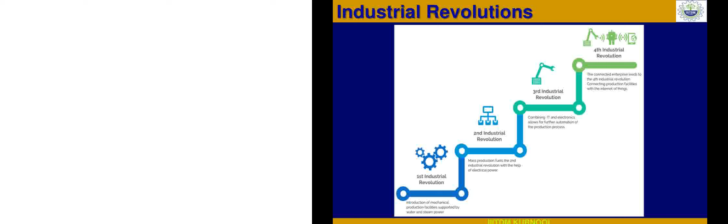So in industry, for complexity and automation, as we move towards the right, automation is improving. But as we move towards the right, the complexity of the systems is also increasing.

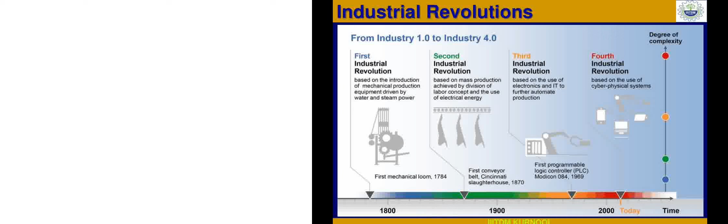I don't want to define this chart, you would have seen it many times, but particularly this area shows how cognizance is given to robots. We will be giving a very nascent problem and then its solution in this particular talk - how it is implemented, that's what we will be seeing. But before that, we will be seeing many other aspects to reach there. Let us move on.

So here, as we have seen, Industry 4.0 is moving forward with different technologies coming up. Last year, Gartner gave these 10 fields which are going to be futuristic areas.

So in that, if you see, people-centric and smart spaces you have. If you touch any of these, at least half of these areas are in some way or other related to robots, like autonomous things. It's kind of robot only. So hyper automation or automation is a robot.

Human augmentation means, in addition to the automation that you have, human also will be placed equivalent to whatever activity a human is expected to do. So that kind of system will be there. So like that, the technology is very much intertwined with robots.

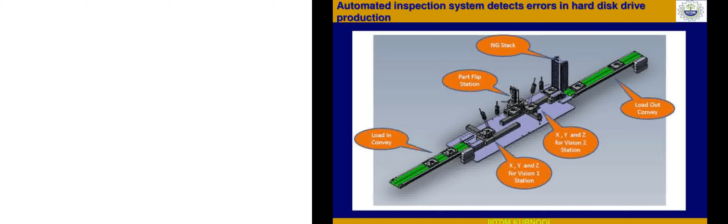So like that, this complete automation is done. Not a big automation like an automobile assembly unit, but this is a very simple inspection area. There will not be any kind of human intervention for that kind of activity. If you see closely how that would have been, okay, that and this scene are different. Just to explain, I'm giving you this picture.

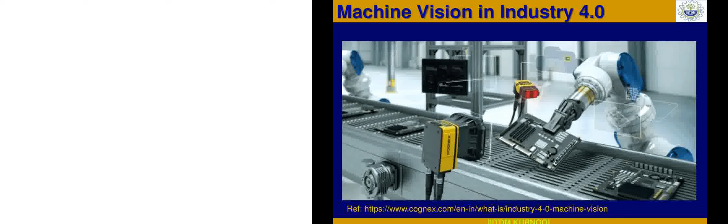So here, vision, if you see as a human agent, like as we are seeing, human is a part of that automation, or human kind of ability should be part of that particular thing. So if you examine ourselves, eyes, ears, nose, tongue, and skin are there for all five senses, and all these five do certain activity.

So to achieve that, first level is eyes. We could achieve that. For ears, we have an audio system which can listen and understand, like Alexa or whatever you are already seeing.

So those kinds of things are already part of the industry. May not be in India, but in other places this has become a kind of norm for industry, for fully automation kind of thing.

And nose, of course up to some certain level, like gas detection - certain gaseous components are possible to detect as of now. Not like our nose, but they have some specific targets, so if that is there in the air, then only it will detect. That is one activity.

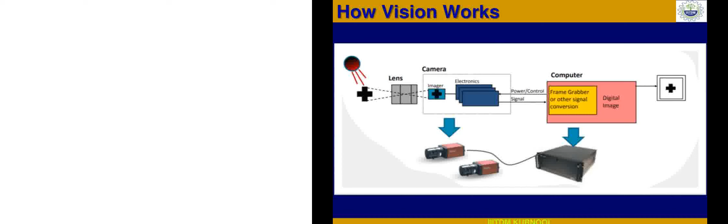The same thing further in, because there are some changes in the cameras. Earlier we needed to have a kind of board on the computer, which now we don't need. Just connect with USB or maybe HDMI port of the computer, and then start collecting the data, the video or visual information of the scene. So you don't need any specific card, because everything can be done on the onboard cameras itself.

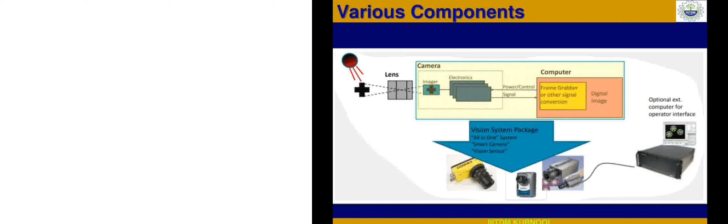So the vision system has the knowledge now to segment the total scene that is there in front of you on the road, in front of your vehicle. So that's how the autonomous vehicles are working.

There are many other things associated with it, like lidar and all that, which are important for making the autonomous vehicle an autonomous one.

Having said all that, if you actually go back a few steps and see how the system or how these kinds of things would have been implemented through neural networks. Here when I say neural networks, there could be even deep learning also part of it.

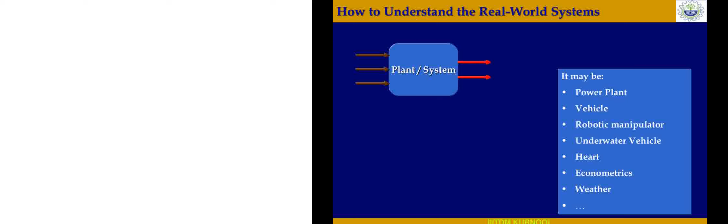A limitation here is that you need to have data. When a human is operating a plant or system, he has some desired position to be reached by the robot. For that desired position, he will know by tweaking what direction or torque components the robot will reach that position.

But how would he know this? He would have been trained on this plant or robot several times. That's how he will know.

For example, when you are driving your car, at the beginning when you're just learning, you don't know how much steering you have to turn to take a certain turning. But as you practice and experience the road with your car, you will know at what angle you have to take a turn so that you won't have any over steering, and you can go smoothly and appropriately.

That's how learning happens in the human operator, whether he is a driver or a plant operator. In that aspect, he is, in a way, understanding the dynamics, the inverse dynamics of the system.

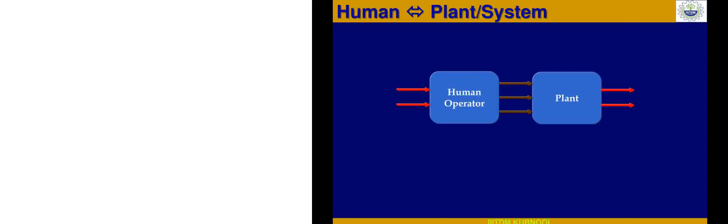When you want to replicate this plant in your computer, the replicated one has to work exactly how this particular robot will be working. So what you need to know is whatever inputs you are giving and whatever outputs you are getting, you take as is, and give as input to the neural network and output to the neural network. I guess by now all of you are aware about neural networks.

However, if you want, we can also touch on some discussion of neural networks. Do we need a discussion on neural networks? Do we need neural networks, yes or no?

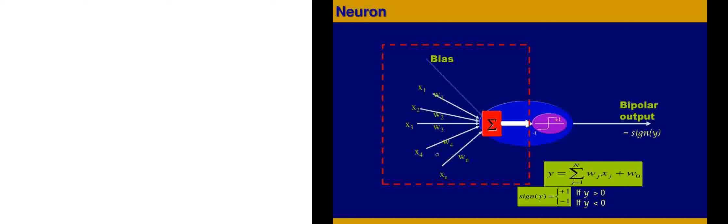But otherwise, in a sigmoid function, whatever value you give, it will give some output value. So depending on your input value, the output value will change. In normal neural networks with back propagation, we use sigmoid or tanh functions. There are many other activation functions these days, but these are widely used. Let's not worry about which activation function needs to be used, but focus on how we solve this problem.

So in simple terms, a neural network will have three layers: input layer, hidden layer, and output layer. However, the hidden layers need not be just one, it can be two, three.

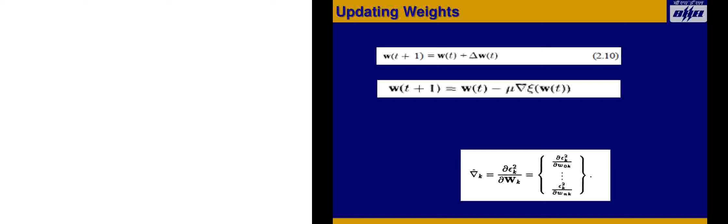This is how the weights are updated, given here. The detailed information, not exactly the algorithm, is given in this particular flow chart. Our focus is more on this; the remaining parts are very simple to understand, but this is what updates the weights. I hope all of you understand.

Yeah, what is that question? What about CNN with respect to hidden layers? So there, it is not - we don't say that as a hidden layer. It is only layers; in CNN, we don't have the concept of hidden layer.

They are only layers where the information is being processed layer by layer in convolution neural networks, where the architecture and mechanism of passing information from one layer to another are different. In a neural network, we have a simple information forwarding mechanism - what we have seen is the calculation y equals weighted sum of x and w plus bias. This is what happens at each layer in neural networks. Whereas in CNN, there is much more mechanism involved where filters are passed.

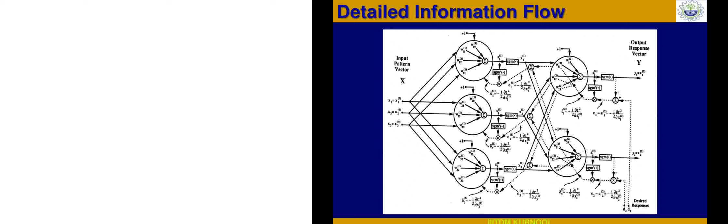Let me show there itself - this is for more classroom kind of teaching, here it may not be possible. So the deltas, this term will keep changing from point to point. Other parameters also will change, but the overall process will be the same. Delta K or delta J will be based on which weights you are adjusting. So like this, it backpropagates - that's why it's called the backpropagation algorithm for neural network learning.

I hope all of you know what is the meaning of learning here - it is only the adjustment of weights to map the relation between inputs and outputs. So in simple terms, that's what happens.

For example, in simple terms, you would have seen y is equal to mx plus c. In that, how do you calculate m? Through normal regression methods, we can calculate that, which you would have done in 8th or 10th standard. There you have only one parameter, m, which is the coefficient that adjusts or changes the relation between x and y.

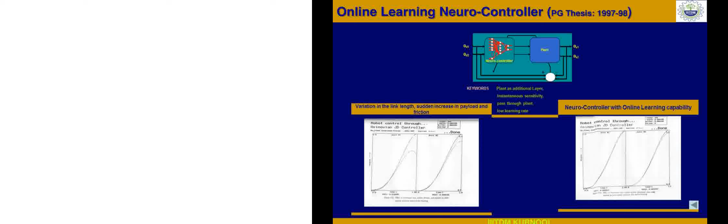So when we want to make it bigger, okay, this concept maybe we don't need here, most of you may already be knowing. So actually, we need to understand the level of automation at which we need to have, whether you want to make the robot very autonomous. There are multi-level, variety of autonomous levels that we will just touch upon here.

So here, basically, this is why different levels of autonomous automation are important. As I was telling, the automation in Industry 4.0 is very advanced, but to reach that kind of advancement in one step will be very difficult. So to address that, industry has come up with a maturity model for automation.

As you know, whenever there is a change in policies, there will be different levels of attainment for that particular policy provision. So here also there are different levels. Without wasting much time, I would like to put up slides before this.

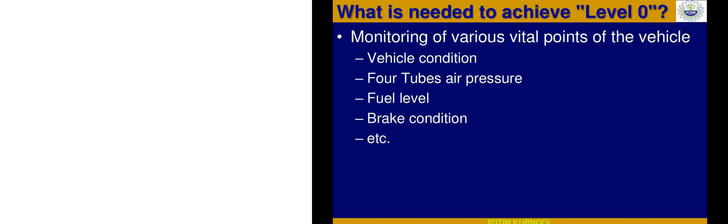When we say hands-on, the driver has to keep his hands on the steering, but the control or steering is actually done by the autonomous system. It will be driving for you, but you have to keep your hands on it. That's the meaning of hands-on at level 1, where cruising, speed pickup, and reducing speed are all controlled by the autonomous system. That's what makes it level 1.

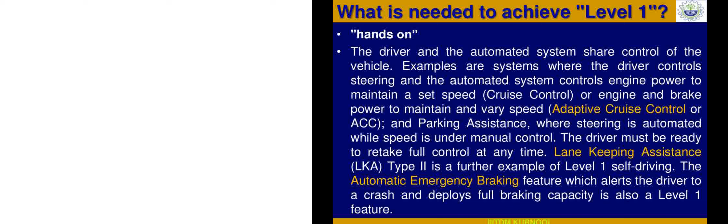So when you go for level 2, you don't have to hold your steering. You can leave it, which means the confidence of taking turns and braking the vehicle wherever required, at the appropriate time, all that confidence is there in that particular system. So that maturity level has increased, or the accuracy of predicting whatever is happening in front of your car is much higher now. That's what it is, right?

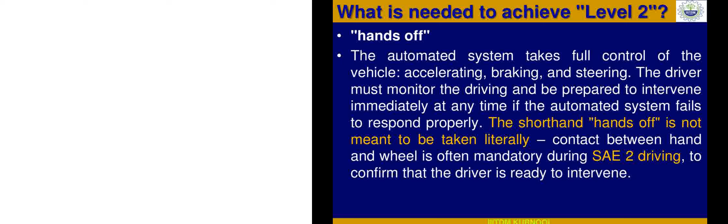At level 3, you can also sleep happily without seeing what is happening on the road, which means in the previous case you should keep watching the road though you are not holding the steering. Just for safety purposes you need to do that, and that's why you would have heard Google have hired drivers to sit on the back seat, so that they will be observing what is happening on the road, but still it is controlled by the autonomous system only.

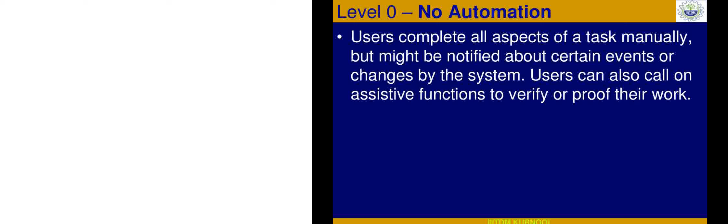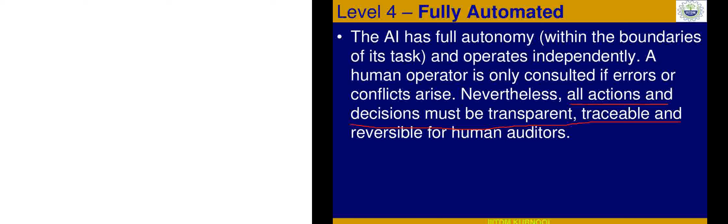Okay, so that's what I wanted first to cover. So that is level of automation. So once having those kinds of automation systems.

If you want to observe those systems closely, then the concepts of cyber physical systems and digital twin come into picture. Right now I'm not sure whether we can go into details, but cyber physical systems and digital twins are very much part of Industry 4.0, which means whatever is going to happen in the future, we will be seeing through digital twins, and then take action appropriately.

So beforehand, whether fully automated vehicles can have intelligence levels like what we defined as level 1 to 4. Yeah, that's what automated vehicle means. Which automated vehicle are you speaking about, Dr. Manish? Because whatever I mentioned are about self-driven vehicles only. So when you say fully automated, what do you mean by that?

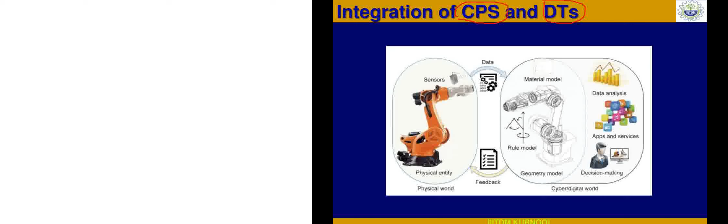All these levels are possible, 0 to 5 levels are possible in autonomous vehicles. But even level 4 is also automated, but as per the maturity model, level 4 has certain features that we have mentioned here. Level 4 means the driver need not be observing what is going on, he can do all his activities. I don't know whether I addressed your question, because this is what exactly I talked about in the previous 4-5 slides.

So each level has certain amount of automation. A level of intelligence is based on controller capacity. It's not about capacity, but the intelligence is what the controller, I mean what computer you have there. What is the model you have in that particular computer? What level of approximation have you achieved about the particular system?

So at the end, what model you have in that particular controller to control your system, your robot, or your vehicle. Suppose to get level 4 or level 5 kind of thing, how many sensors are essential to be part of your vehicle? For example, as I mentioned in the beginning, 5 different sensory things.

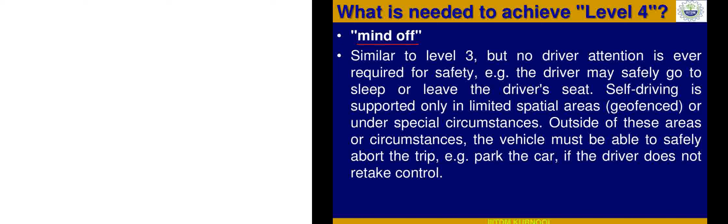So it's all about what capacity your computer has that is sitting on the robot. That's what is essential. I hope I made it clear.